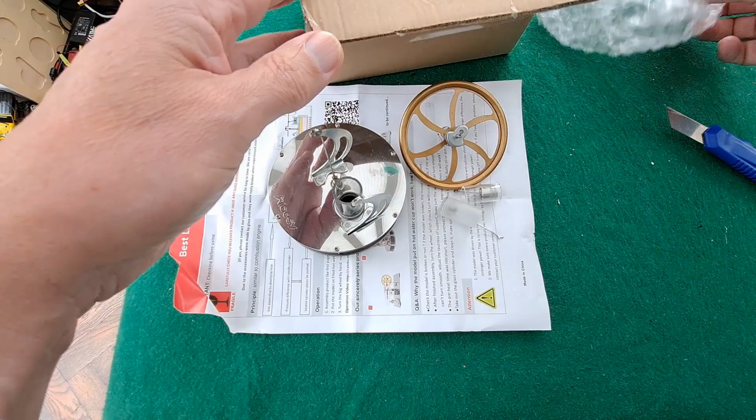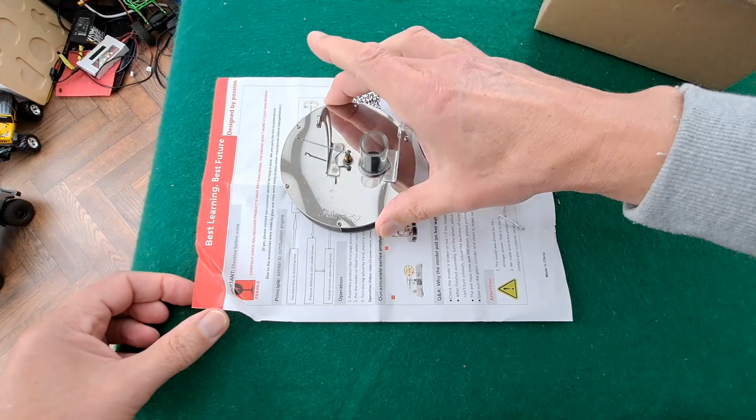Oh gosh, I wasn't expecting that yet. Well, there we go, I'll have to put that one together. Maybe even read the instructions. Oh, does that look like it's broken? Don't know, I reckon it might be.

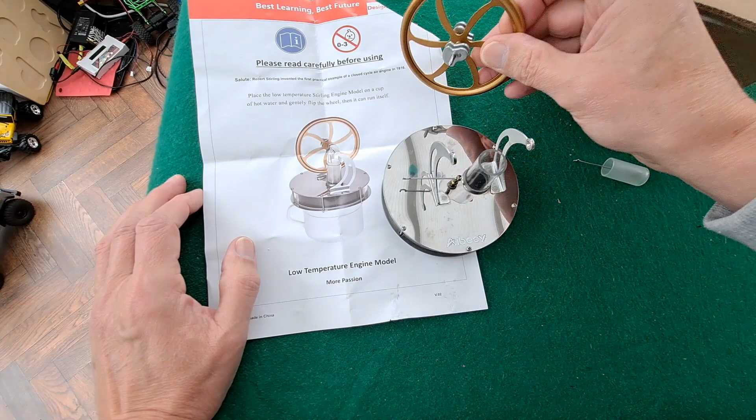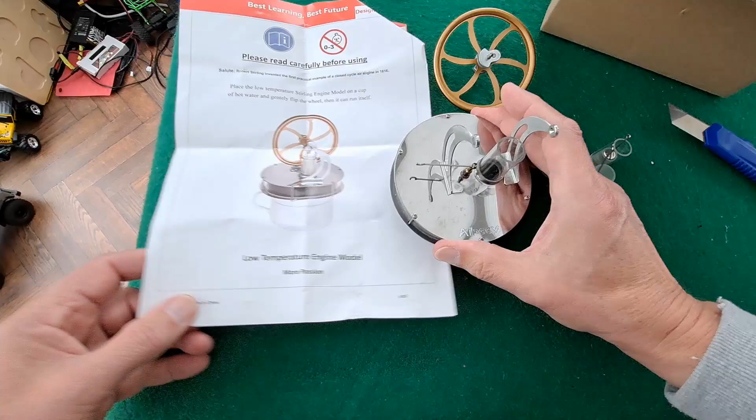I'm going to have to read the instructions for a minute, see if I can figure out how it's supposed to go together.

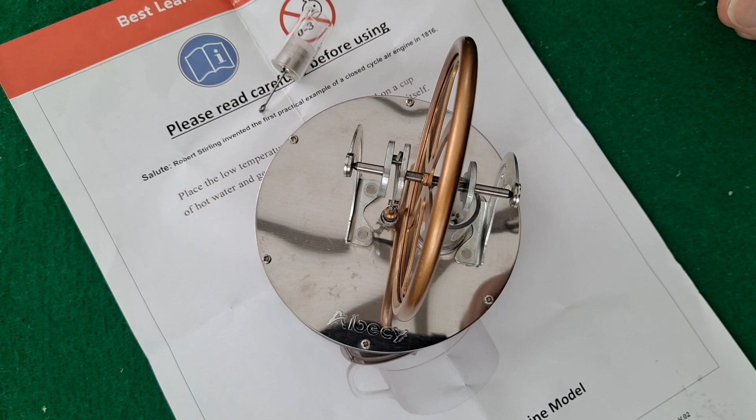Yeah, I'm not sure why we've got two of these. Right, I have to do a bit of reading. Well, I'm pretty sure what we're looking at is a broken one that's been shipped out to get rid of it. That one doesn't appear to be anything to do with it - that's from something else entirely.

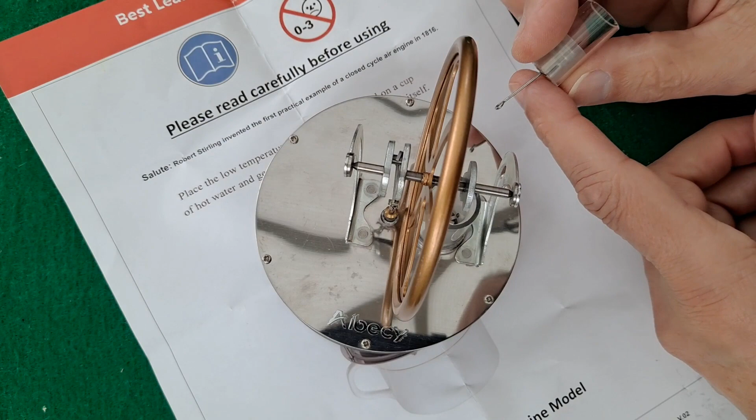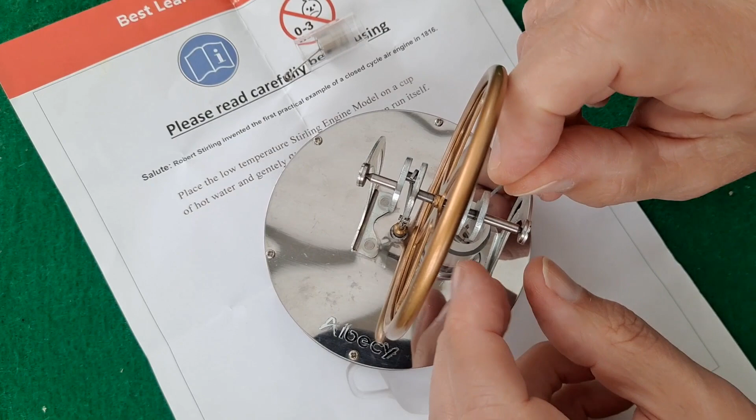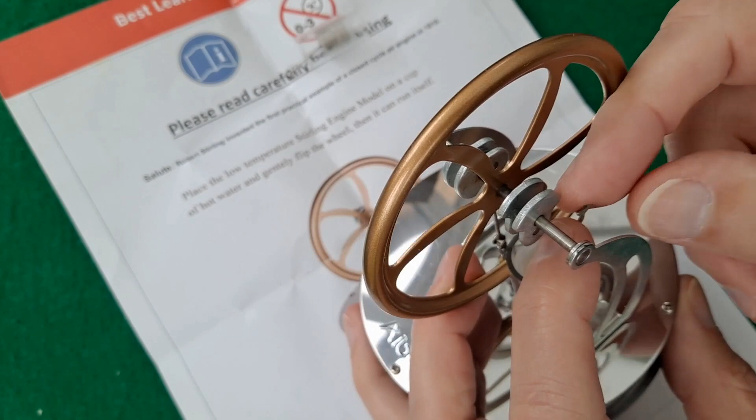And this one, as I showed you when I opened it up, it's broken. There should be a loop on the end of that, and that's broken off, so I'll have to see if I can solder a loop on there or something so we can actually get it going. I reckon this is one that was damaged in transit or something, returned, and now they're just trying to get rid of it.

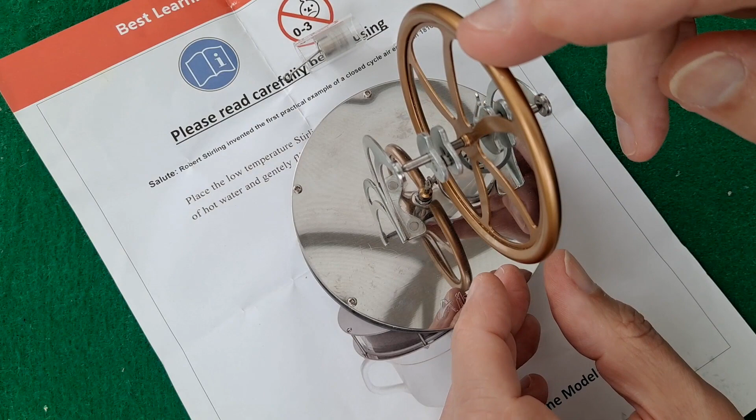That doesn't seem to line up because that's rubbing against the edge of here, although that's actually loose on there.

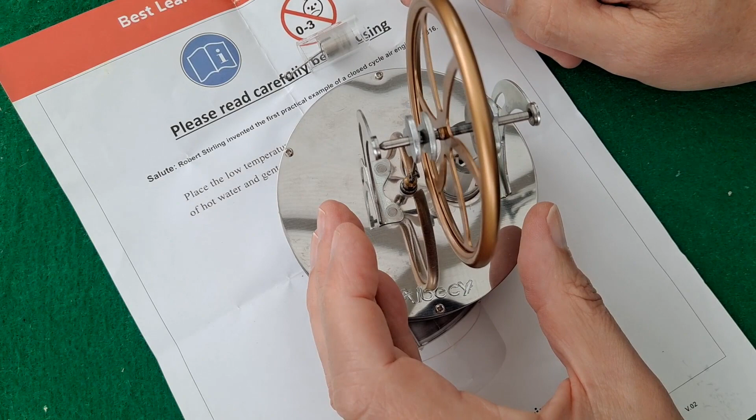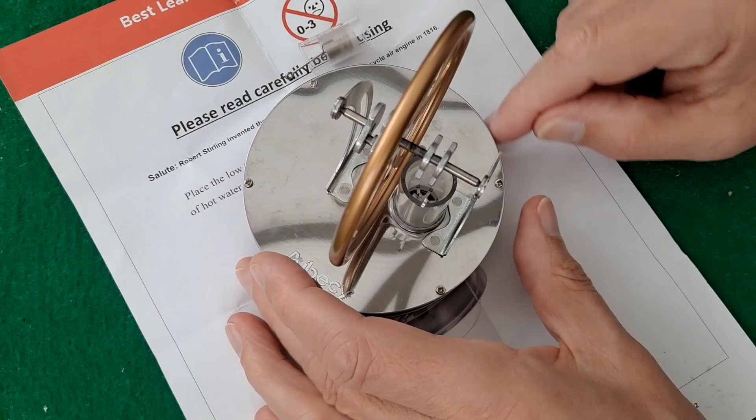Okay, we're going to have to do a little bit of work here, see if we can actually get it working. See, this one is definitely broken.

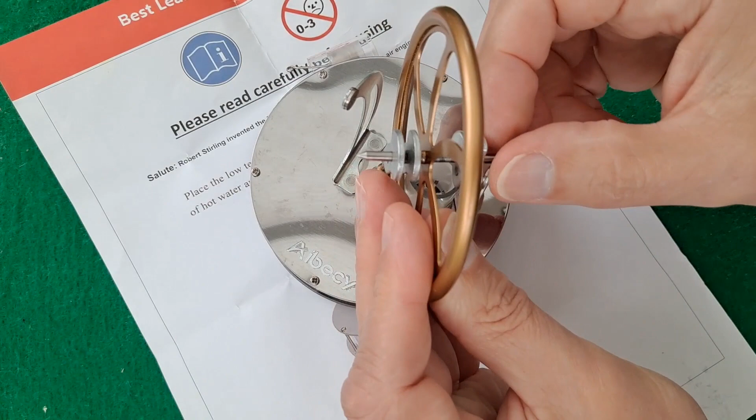I should think I could bend a paper clip to do that. Take that off there again. Yeah, I should be able to bend up a paper clip to replace that. So we should still be able to get it working.

Okay, that's what we'll do. Just bending up a paper clip to match the original linkage. I think this will do the job.

Well, we're not having much success so far. I'm not sure which way round I should be trying to spin it, and we're not getting a run from it whichever way I try and spin it.

Got a nice cup of boiling water underneath, and I've even put an ice cube on top to try and give us the temperature difference. The shaft going through is bent. I got a feeling this is a second-hand one, or a faulty returned one. I mean, obviously I've had to replace this linkage on this side.

But we're not getting a run from it at all. Because the shaft is bent, the wheel doesn't spin vertically - you see it's wobbling around a bit.